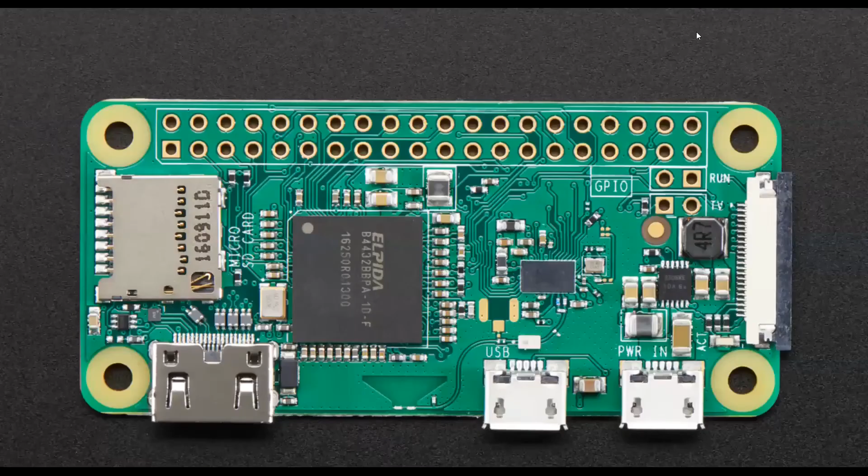Today what we're going to do is a hands-on section. We will design and case a 3D printable case for Raspberry Pi Zero or Raspberry Pi Zero W version. This is going to be a simple design, we can do it within 20 or 25 minutes, below half an hour.

It will only take below half an hour, about half an hour, depending on your skills and the time you take, but for me it will take around 15 to 20 minutes. So we will design a simple Raspberry Pi case. I took this case because most of you guys build projects using Raspberry Pi, Arduinos, ESPs, or your custom built PCBs.

Recently in Maker Chat 02, Vishnu gave us an introduction and hands-on section on how to design your PCB using KiCad and open source PCB designing software. So that is an ECAD.

Here, what we're going to do is build a 3D printable case or mechanical parts. You can design it in an MCAD, which means mechanical CAD software, and you can 3D print it using any 3D printer. So today we're going to design it and also go through how we will 3D print the design.

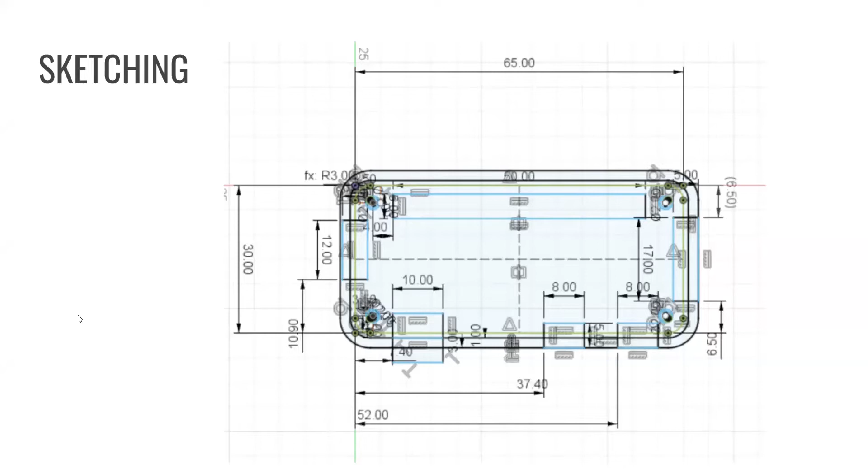We will go through the hands-on section much more. This is the case we are going to design today - a Raspberry Pi Zero case. You can design it within 15 or 20 minutes, and after designing, you can directly 3D print it.

I think now we can go to the designing section.

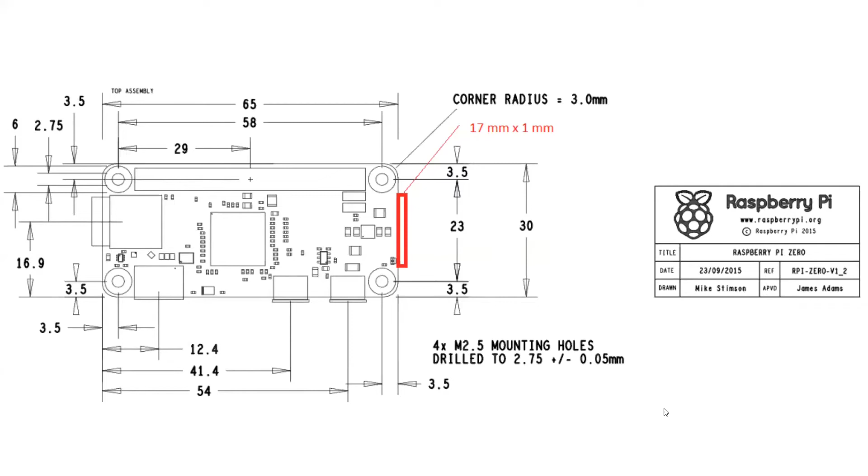I'm changing my screen share to Fusion 360. Here is Fusion 360, and this is the final sketch of the 2D Raspberry Pi Zero, and this is the 3D model of the Raspberry Pi Zero casing.

So here, let's see what is the interface. I will give an introduction to the interface.

First you need to create an Autodesk account and log into Fusion 360. You need an internet connection to use it, because Fusion 360 is cloud-based, and it also has a client application. What you see is the client application, and it works exactly like a browser, such as Mozilla, Chrome, or Microsoft Edge. Most functions like calculations and designing work on the client side, but rendering, simulation, and animations are done in the cloud, and project file savings are also done in the cloud.

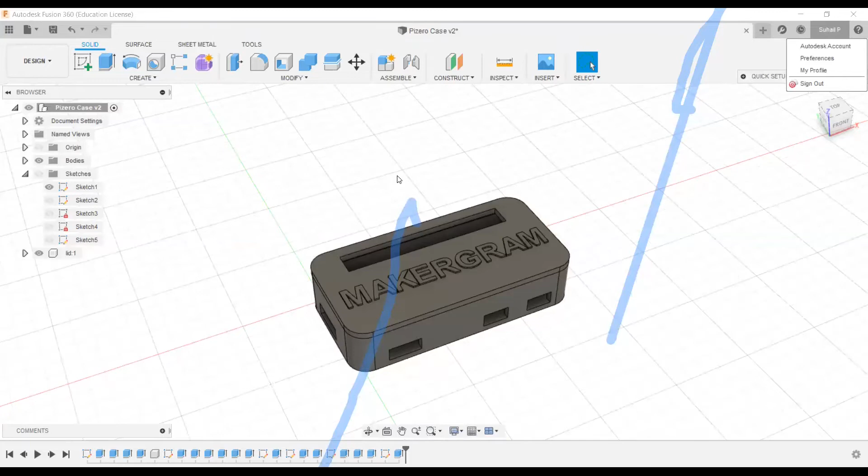So let's begin. Here in the hamburger menu, you can see all my project files. When I go to my project explorer, or the project file window, you can see there's not much since this is my new account. For this ESP32 TinyPico project, I already have a Pi Zero case.

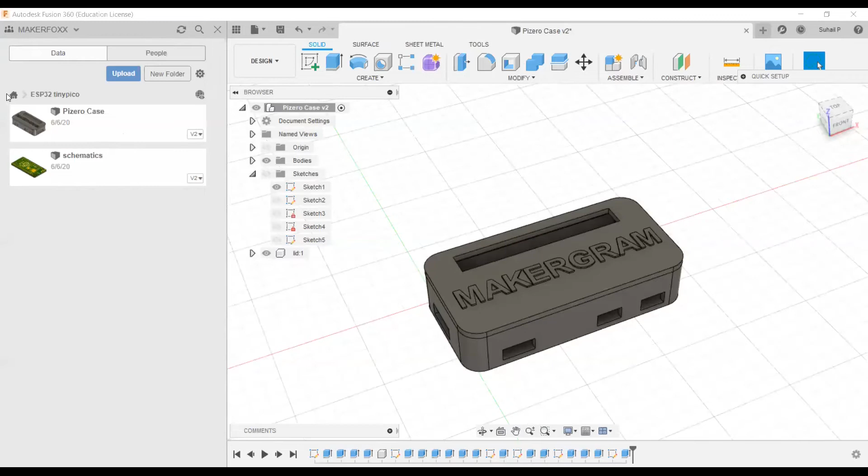Okay, yeah, so these are the projects where your work will happen. You can create a new project here, or you can directly save as a new project.

This is the project explorer window, and there is a small browser here called the project browser window. This is the project explorer, like the project explorer, which means there are a lot of sketches, 3D models, and constraints, or components added while you design. These will be accessible from this project browser window.

There's also a normal file option to create a new design, and you can create a new electronics design. There's a save option, upload option, and export option. You can export it as different 3D file formats for different CAM tools and design software. And there's a 3D print option, as I mentioned before, so we can directly 3D print your 3D model.

Another benefit is that we can directly create multiple tabs and design multiple 3D models in the same software window. There's only one Fusion 360 window open right now, but you can use multiple tabs just like in a browser such as Chrome or Mozilla Firefox. You can add multiple tabs, close tabs, and design multiple 3D models across them.

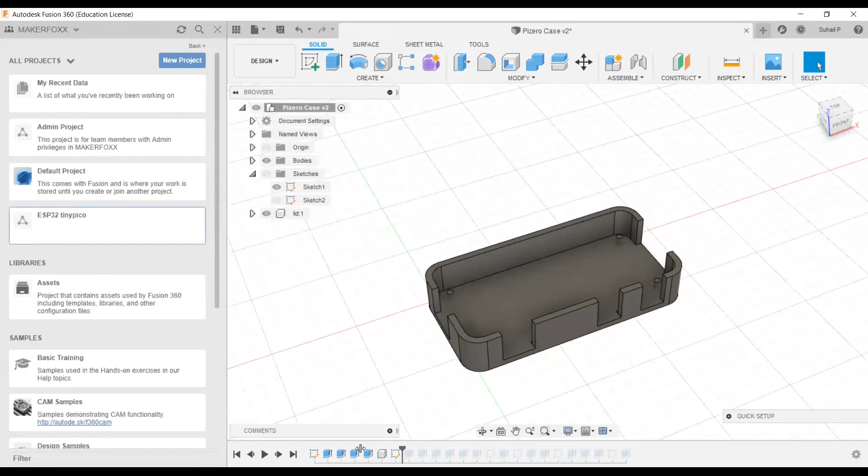There's another option at the bottom called the media control options. This is one of the most useful features in Fusion 360. Whenever you forgot to add something, or need to change a parameter or dimension or measurement, you can directly go back from here to any of your previous steps and change it.

This is the beginning of the sketch. I can right click on it and edit it. When I click edit, I can directly edit the sketch, and when I finish, all the changes will be saved to that design, and we can come back to the current position. This is also a benefit because you don't need to do undo and redo. Instead, you can directly go back to any point in the design process whenever you want. Here, around 20 steps of the design process were used, so you can go to any previous step and change the parameters.

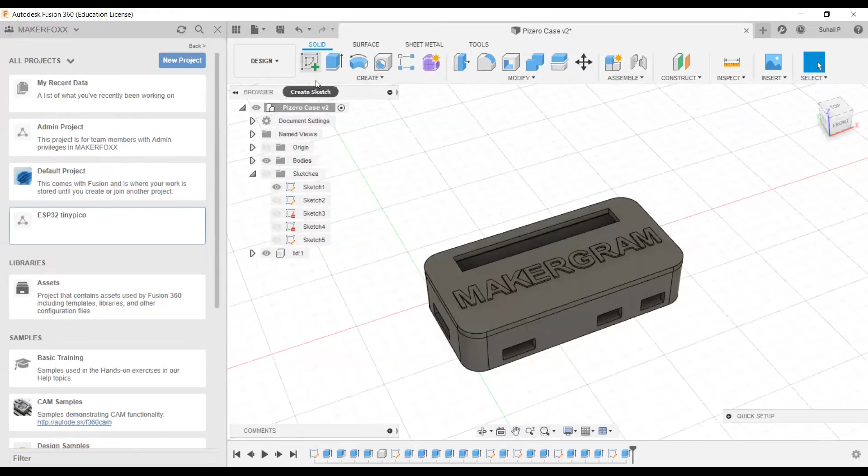Other than that, these are the project workspace. When I zoom out, you can see this is 200 by 200, and it will expand automatically according to your dimensions, so you don't need to worry about the workspace. From here, you can create a sketch, and these are the options to create a sketch in the design.

As I previously mentioned, there's a design workflow: design, render, animation, simulation, manufacturing, drawing. Today we'll only be covering the design section. In the next maker chat, we can hopefully cover rendering and animation.

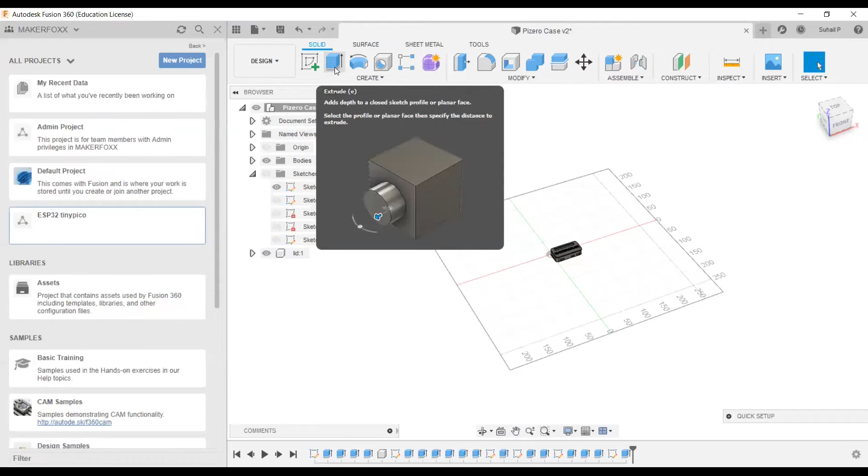In the design section, we have sketch creation, where we can start from a sketch. Then we can do extrusion, taking a 2D sketch and directly extruding it into a 3D model. There's also the revolve option, where from a single sketch like a circle or rectangle, we can revolve it into a 3D shape.

Holes let us create a hole in a 3D model. Rectangular pattern lets us place 3D models in a rectangular pattern. And mesh, or create form, is basically sculpting - exactly like clay sculpting, where we can sculpt from a 3D model.

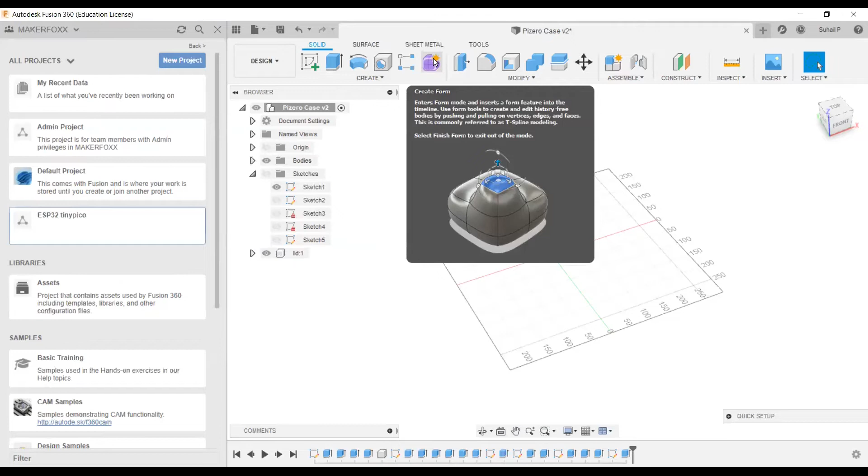This sculpting feature is not commonly used much. There are other tools like press pull and filleting, which lets you round edges and corners. There's also shell, which lets us shell a 3D model, as you can see in the image.

If we have two 3D objects that need to be combined into a single object, we can directly use this tool to combine them. There's also another tool for the opposite - from a single 3D model, you can directly split it into two objects.

There's also a move and copy tool, and another for new components. In Fusion 360, you can directly see components here - this is the primary component, or the mother component. In Fusion 360, we design using 3D bodies and components.

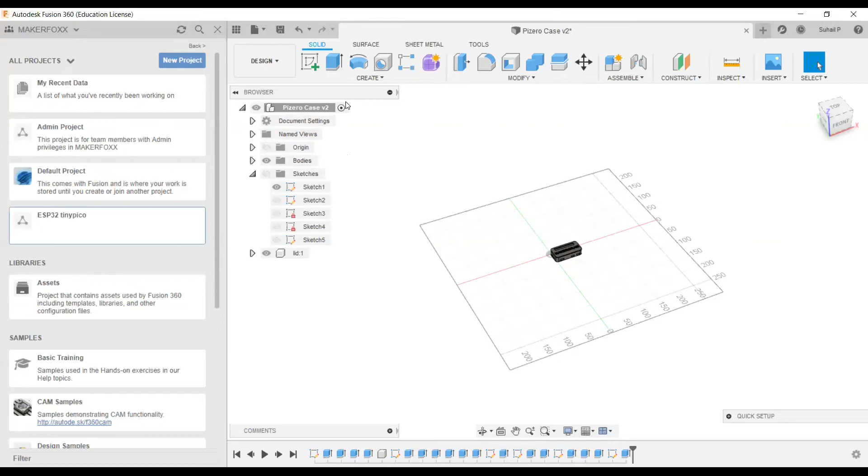Objects are multiple 3D models, and components are multiple components. Let me show you an example here. This is a 3D case - the entire case. So there's a 3D model here, a 3D body.

In 3D mode, there's an eye icon - if you use it, you can show that 3D body in your workspace. When I turn off the eye icon, it disappears from the workspace, and when I turn it on, it comes back. This is the first Pi Zero case we took, which is the primary component.

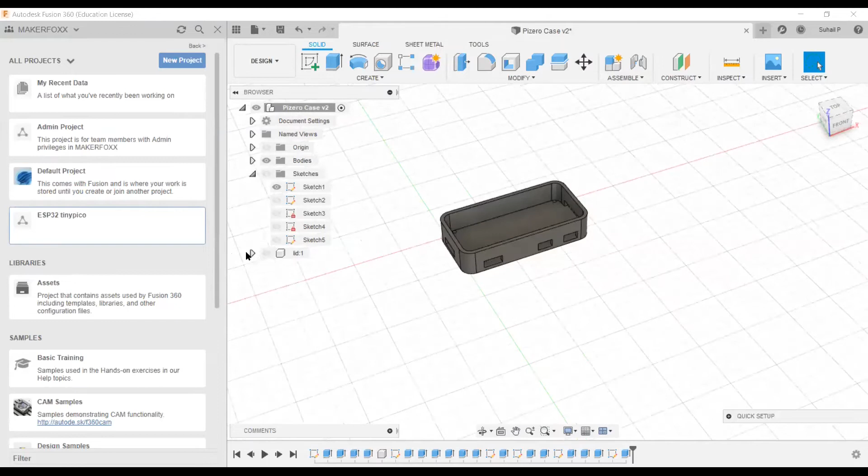There's another component I added named 'lid,' which is the top cover - the top portion, an entirely new component. These components are used for creating multiple parts. Here you can see only the lid when I turn that on, but when I click on the primary, I can see both.

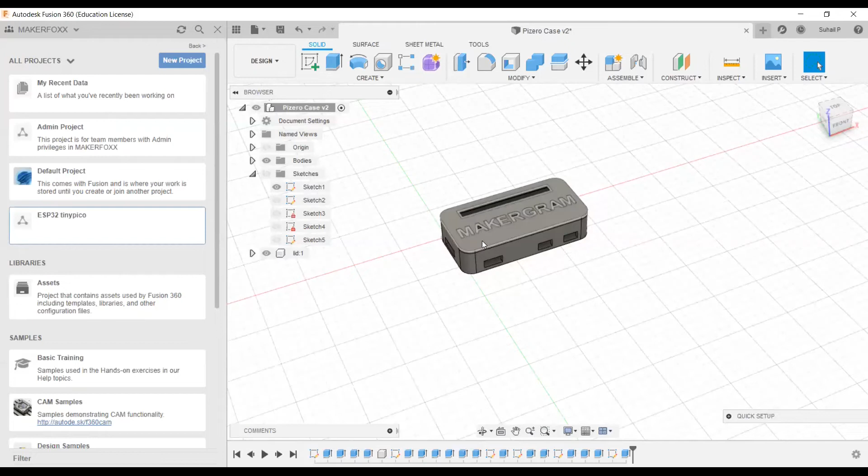If we consider a phone case, there are a lot of components: the frame of the phone, the front screen, the digitizer, and the back portion. Components are mostly used in product design, not prototyping. For rapid prototyping and additive manufacturing, we don't need components that much, but if designing a product, there are a lot of mechanical or electronic components involved in the design.

So we can go to the commands. These are the basic sections, the basic work interface of Fusion 360. From here, we're going to directly start designing the Raspberry Pi Zero case. Here there's a sphere.

The sphere is a view control - a 3D view that we can control. To control the 3D view, you can left click on that sphere or the cube and do the pivot for a free view, going to any side. Alternatively, if you don't want to click and drag directly, you can click and hold shift while using the middle scroll wheel button of the mouse.

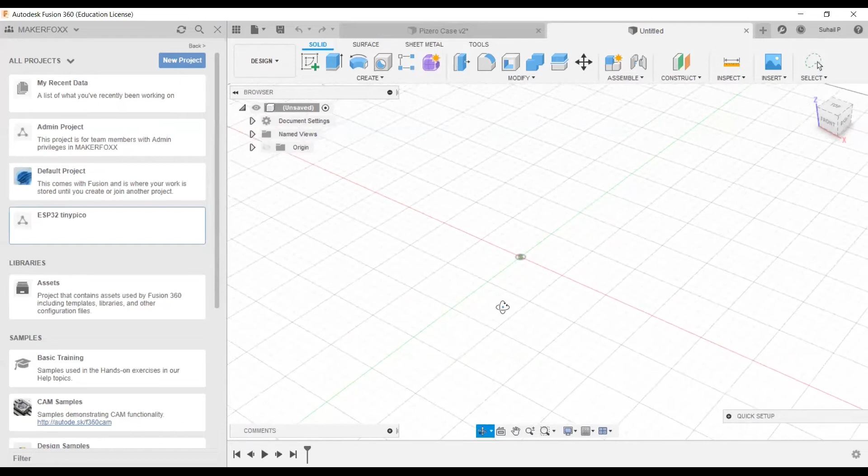Click the mouse button and hold the shift key, and you can directly free view the workspace. But instead, I'm just going to top view. I click on that cube, the top section of that cube, so here I got the top view. Using the mouse wheel, you can scroll down or up to zoom out and zoom in.

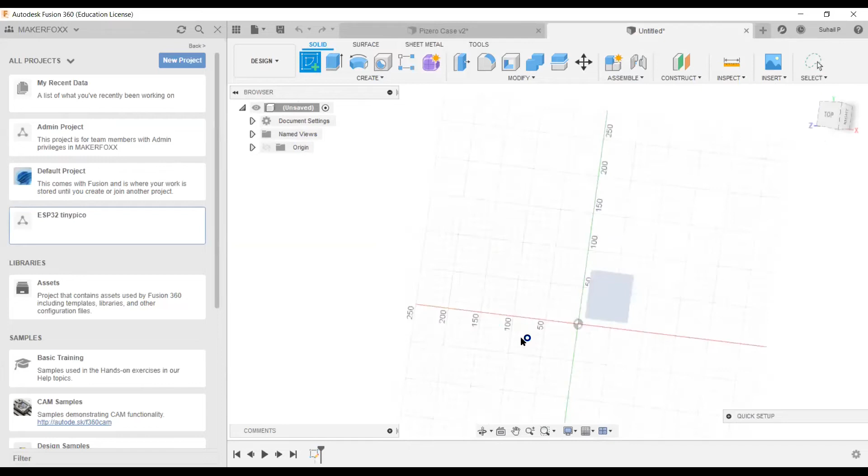To create a sketch, we need to start from a sketch. So click on the create sketch option and come over here. There are three surfaces, XY, XZ, and YZ. What I'm going to do is I need the bottom surface, so I just use the XY surface. When I select the XY surface, it automatically comes to the top view, because we can see the top view from that surface area.

To design a Pi case, I need the exact dimension of the Raspberry Pi Zero, so I took a screenshot from here to take the reference of that dimension. I just click escape, because it's much easier to see like this. The exact dimension given here is 65 into 30 - the length is 65, and the width is 30. It's already in mm, so we are doing it in mm. 65 means 6.5 centimeters, and 30mm means 3 centimeters.

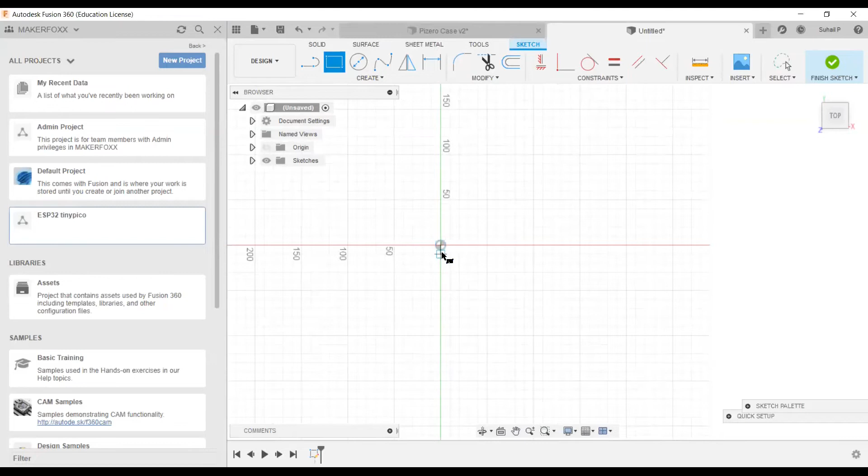So I'm going to draw a rectangle here. To draw a rectangle, I click on rectangle, and when we create a sketch, here we have a 2-point rectangle option. I click on the 2-point rectangle and go to the origin, which means 0,0,0. I click on the origin and drag it here. To change the dimension, I can insert values - there are two text boxes for height and width. I enter 30 for height, and 65 for width. So we got an exact 65 by 30 rectangle.

From here, I zoom in a little bit to see much more in detail. I go back to the browser and I need to check the corner radius. Here they said the corner radius is 3mm.

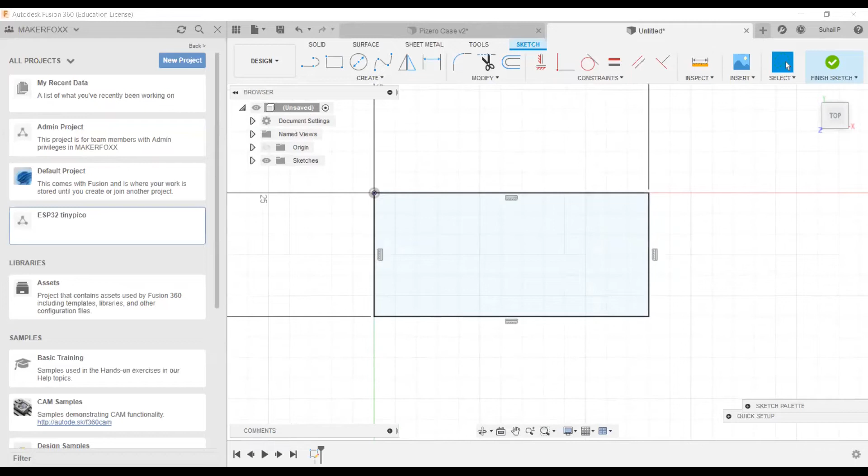So I came back to Fusion 360, and there's an option for filleting - this is for 2D filleting. I click the 2D filleting option and click here. You can see a red mark showing how it should happen, so I click here and enter 3mm. When I do the 3mm, it fillets to 3mm - one of the corners is done to 3mm. But I need to do it simultaneously - I need to do the other 3 corners at the same time.

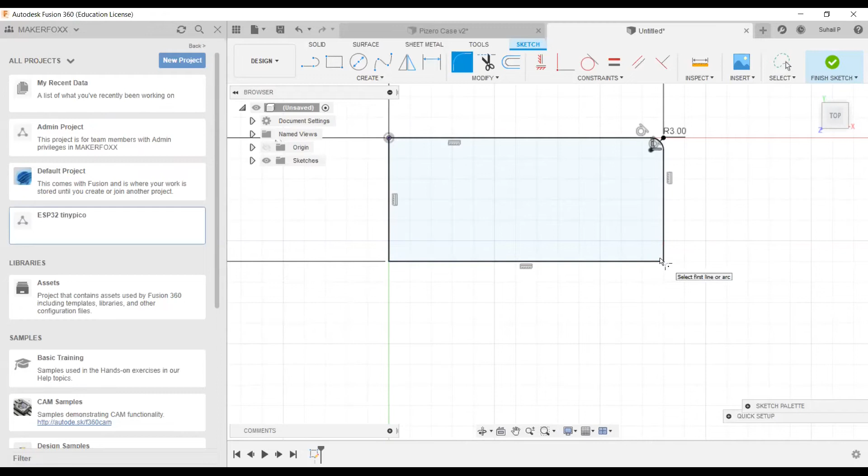So what I'm going to do is click here and hold shift. When you click and hold shift, you can select multiple corners. Right now it's set to 5, so I just enter 3 into the text box.

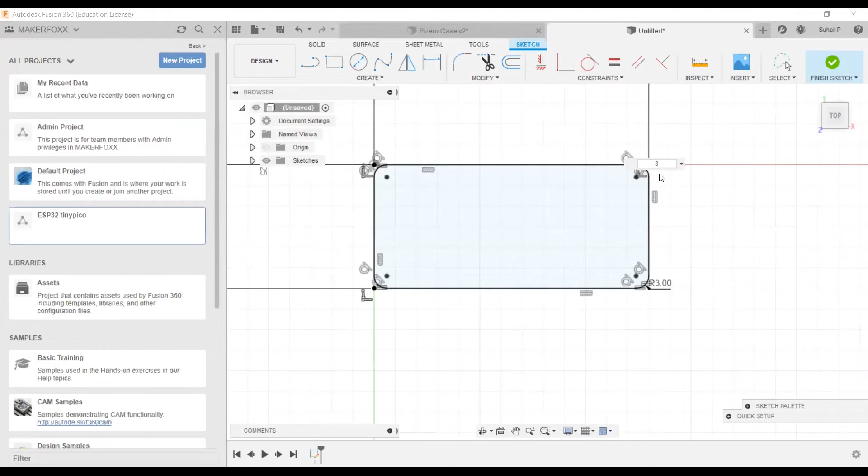The default dimension unit is mm. If you want to change to centimeter, you can directly select the centimeter option here - the default is mm. So whatever number you enter, it takes it as mm. But if you need meters or centimeters, you can directly select centimeter or meter, or if you want inches, just insert 'in' and it will convert to inch. But right now we just need mm, so I inserted the 3mm.

Now what we want to do is insert these 4 screw holes. The distance is already specified. Let me annotate here using the spotlight tool. From here to here, it's 3.5 mm spacing, and from here to here, it's also 3.5 mm. From the left side to 3.5 mm spacing, and from bottom to top, also 3.5 mm. So there's a little bit of padding.

So what I'm going to do is create a circle here. Let me select the circle tool. Before doing the circle, I need to know exactly where the 3.5 mm point is. So I take the line tool, click on it, and draw a line. It has a magnet feature.

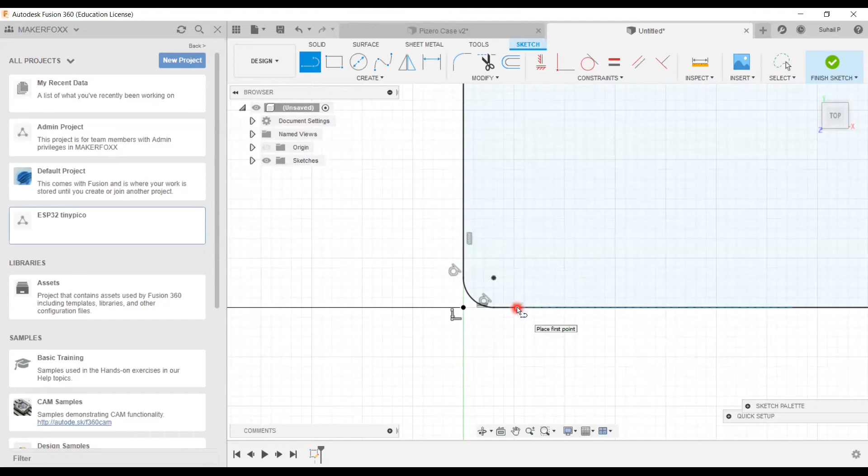Whenever there is a line, pole, edge, or surface, it will automatically connect or focus into that line. So here I create a line. From here, I'm going to set it to 3.5 mm, and I just click enter. So there is a line here.

Then I need to create another line, and I'm going to set it to 3.5 mm here as well. So the circle needs to come here, from here to 3.5 and from here to 3.5. So I just added this line here.

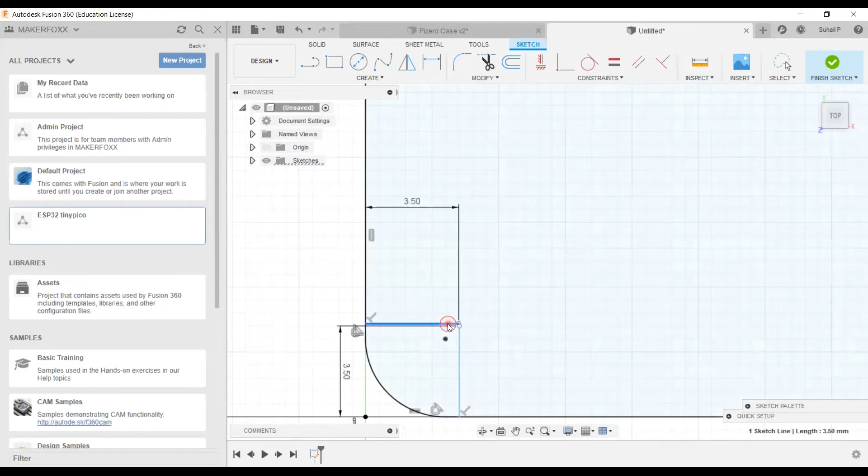What I can do is move it here. I just click the line and drag it here. So I just drag it to here. So these both are 3.5.

But these lines, we don't need them as lines. Instead, what I need to do is click and hold the shift key, and convert it to a construction line. To do this, go to the constraints - or actually there is a sketch palette here. I open the sketch palette, and there is a construction option.

The construction option is like an index line, so it doesn't appear in our final design. It's only for our measurement purpose. So I converted it to construction lines. You can see the construction lines here are a little bit blurred, and shown as dotted or dashed lines.

Now I selected the circle here, and I need to know the dimension of that circle - the screw hole size. Let me see... yes, there are 4 M2.5 mounting holes here.

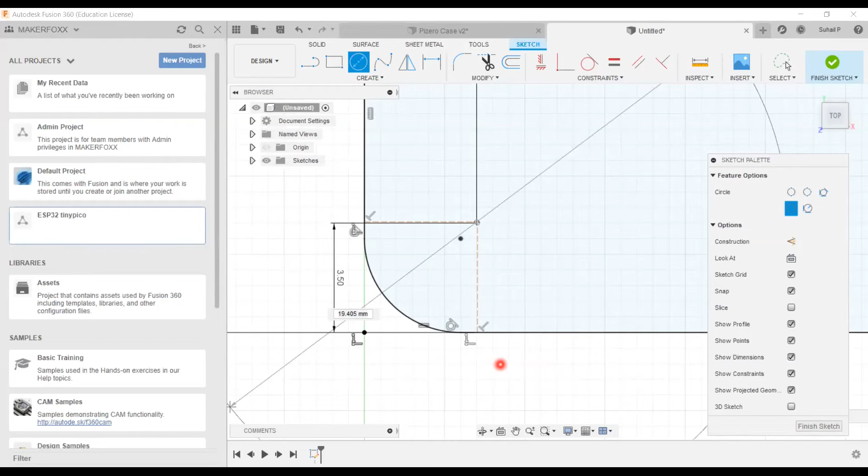So drill it to 2.75, with a tolerance of 0.05. So we need to take it as 2.75 mm drilling holes. So what I'm going to do is enter 2.75.

From here, what I need to do is copy it to multiple locations. I don't want to add it by repeating the same function for the remaining three corners. Instead, I'll select the line tool again.

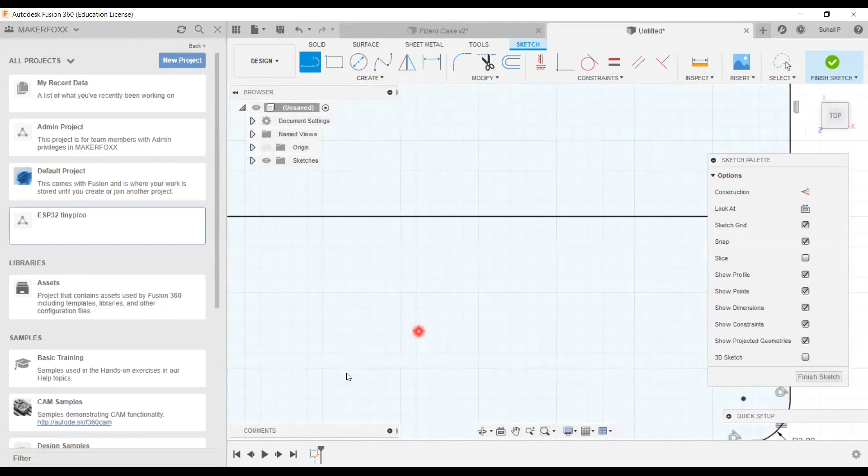I just come here, and here you get a triangle, which means it is the center of that line. So I go to the center of that line, and come here, and here also we got a triangle, which means it is the center.

So I click it here, zoom out, and come to the width side, and I got the center line. Then I go to the next opposite of that line, so I got the center of the area - this is the center area.

So what I'm going to do is change it to a construction line again. I click escape to exit the tool, select both of those lines, and convert them to construction lines. You can see it has changed to construction lines.

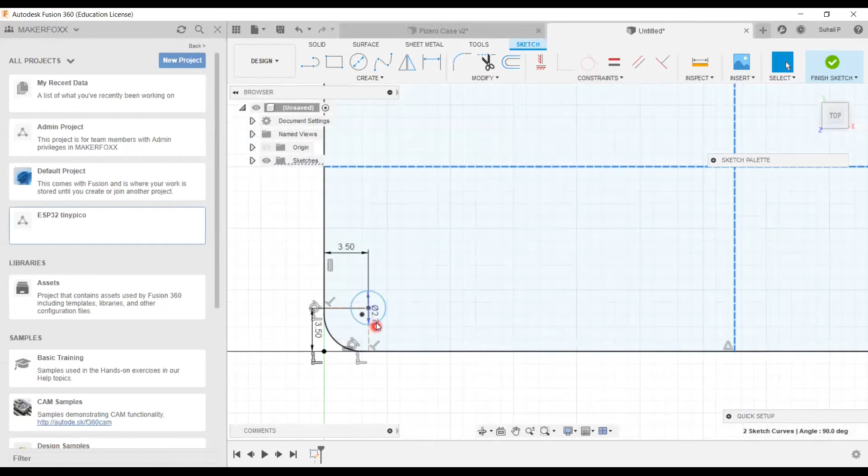And what I need to do is mirror this circle to here. So there is a mirror tool here. I click the mirror tool, and you get a parameter window.

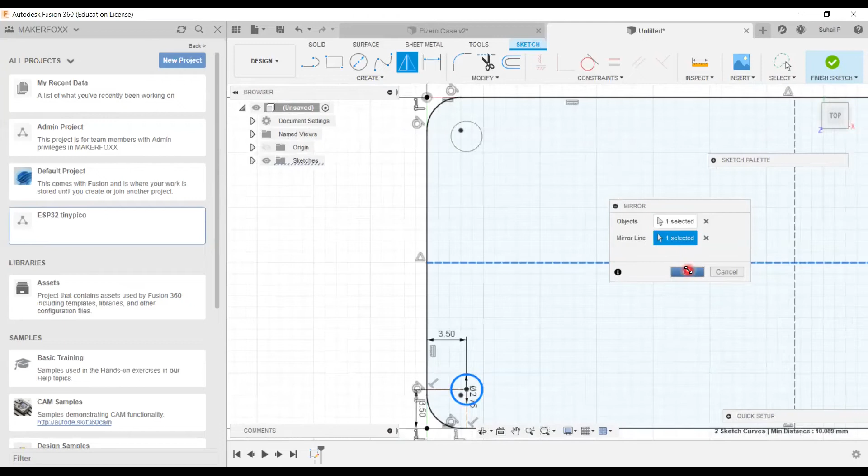What I'm going to do is select the circle. I need to deselect all this, and select it again so I get one object selected. For the mirror line, it's just an index line, so I select here. You can see it is directly mirrored to here, with exact dimension. This is a symmetrical mirroring of the circle, so all the parameters and dimensions should be exact.

So what we can do is measure if it's the same. You can select the dimension tool - here is the sketch dimension tool, or you can simply use the shortcut key D. I click that circle, select the top line, and shift hold to multiple select, then click the circle.

See, this is 3.50, which means 3.5. So we don't need that - I just deleted that dimension. So here all these are the same.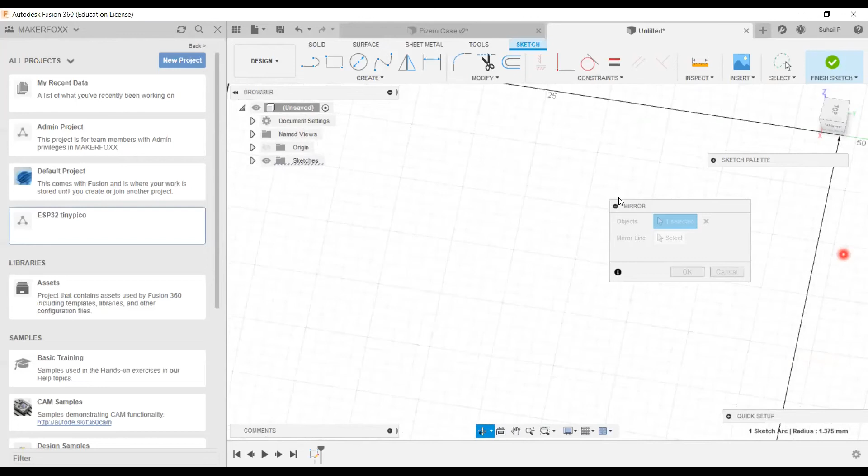Now I want to again mirror this to the opposite side. Sorry, sorry for that. Yeah, okay.

So I select both of them, and use the vertical line to mirror this vertically. See, it comes to the opposite side, and everything is in the same location. So here we added the mounting holes.

Now what we're going to do is the header pins, 2 into 20, 20 header pins. These are 2 into 20 Raspberry Pi header pins, with dimensions 50 into 5. They don't mention the measurement of the header pin, so we need to take it manually.

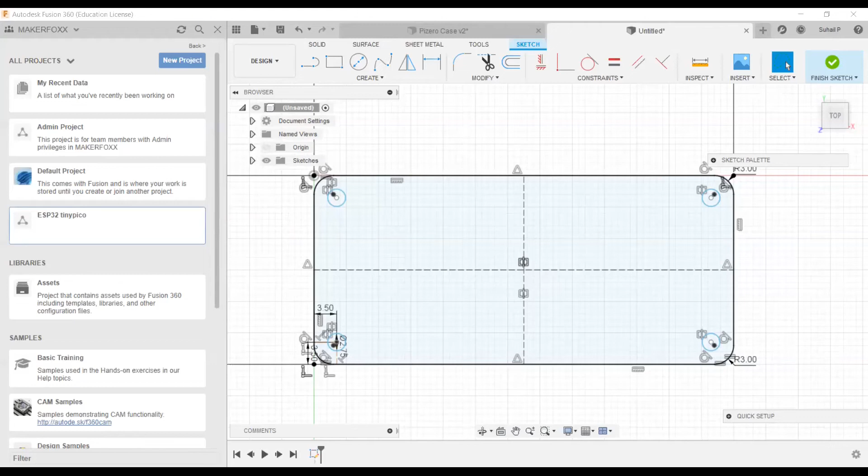So I took it from my Raspberry Pi - it is 50 into 5. So what I'm going to do is create a rectangle, and make it 5 and 50. So 5 into 50 here.

Now what I need to do is bring it to the exact position. From center, like from the 25mm center of that header pin to here, it is like 29. So from here to here is 29.

To do that, come to Fusion 360. Take the dimension from here to here, it is 4.5, and from here to here, sorry, to here, it is around 3.5.

So what I'm going to do is take a calculator - I prefer a normal calculator. I add 50 plus 3.5 plus 4.5, which equals 58. Then I need to minus the 50, the size of the header pin, giving 8. So I need to keep a distance of 8, 4, 8, 4, and here to here 4, so it remains an exact 50 in the same location.

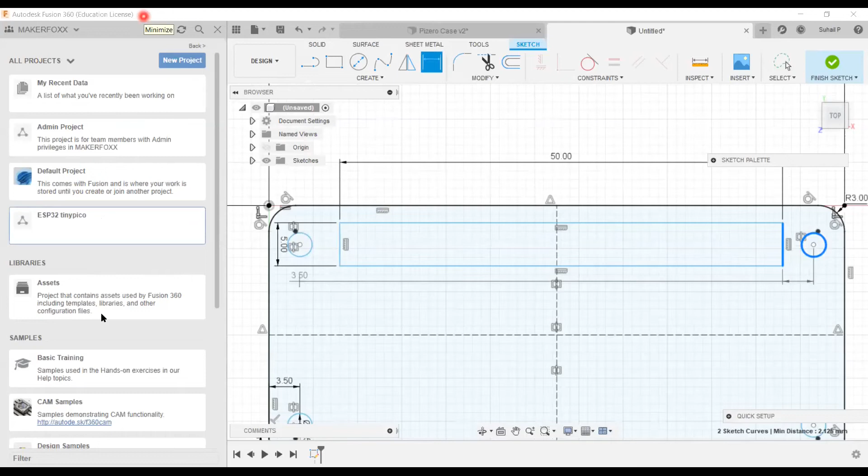So what I'm going to do is select the dimension tool, then select the circle, and give it 4.

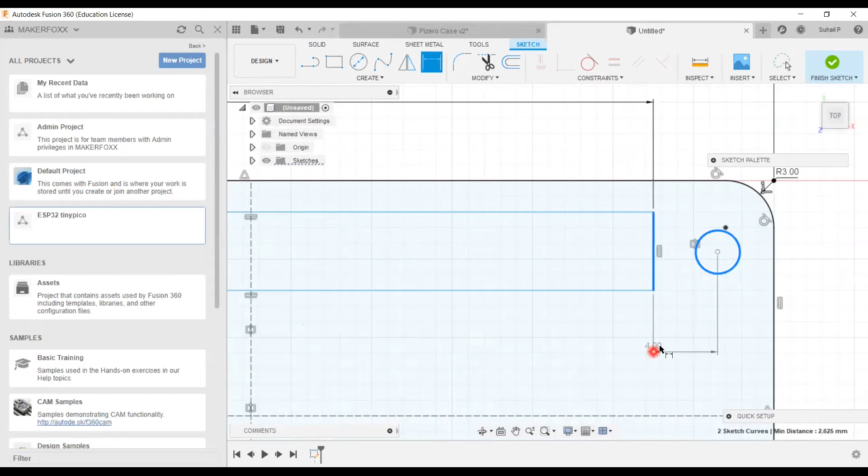So we need to check - here from the circle, from the hole to the header pin, it is 4mm. We need to recheck the other side to see if it's exact and correct. So I select here, use the dimension tool, and got it is 4mm. See, it is 4mm.

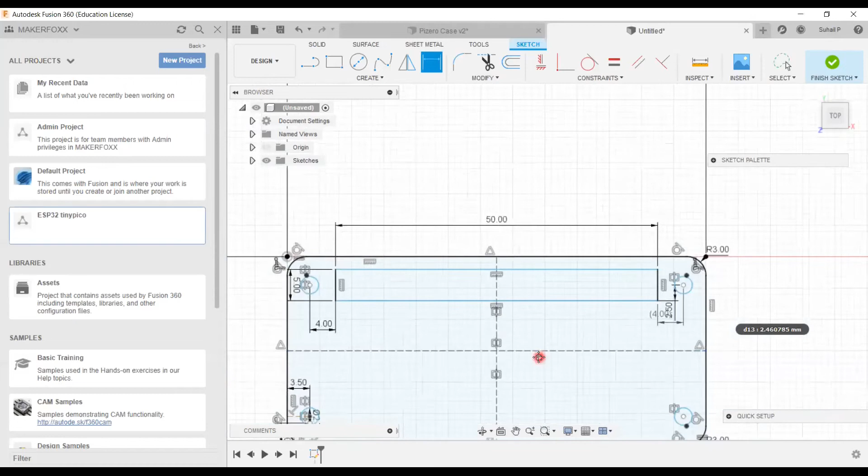So right now it is in the exact location, and we need to check if there are other constraints to center it. We can try that - it is already in center. So I select both the lines, and set it to 2.5. Now it is exactly in the same location as that header.

Next, we need to do the header pin. So instead, what we need to do is search for Raspberry Pi Zero, Raspberry Pi Zero W, and see the image. From this image, there is an SD card, a mini HDMI port, and two...

Suhail, hello? Actually, we can only see your Fusion 360 window - we can't see the image because you only shared the software. Okay, sorry, so it will share both. Salman, is there anyone recording the video? Yeah, recording, yes, thank you. Let me stop this screen share and change it to the next one. Okay, thank you.

Thanks for notifying me. So can you see that Raspberry Pi Zero here? We've done these 4 holes and header pins, so it is in the exact location.

Now what we need to do is align this SD card holder, this mini HDMI port, the 2 micro USB ports, and this flex cable connector. So let's see what dimensions they are giving.

What they are providing is the flex cable connector is 17mm into 1mm, so we need to make a hole of 17mm. For the SD card, HDMI, or micro USB, they did not give the dimensions, only the spacing from the center. So they gave us the alignment of the component but not the measurement.

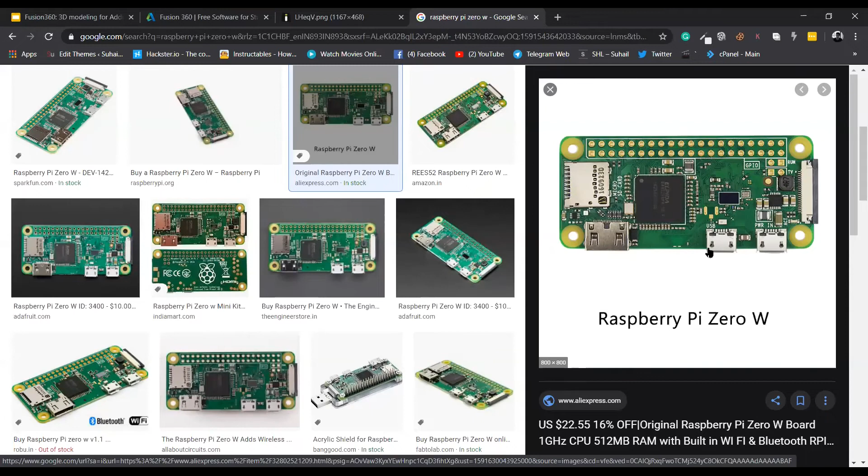So we are going to Fusion 360. Let me share my screen to convert to Fusion 360. I'm going to share Fusion 360, hopefully you can see it here.

So what I'm going to do is create a rough rectangle, like 12 and a tab, just any like 6 or something, so I just want to put it in an outside area. So here, what I'm going to do is 12 - I just need the height, not the width, so 12.

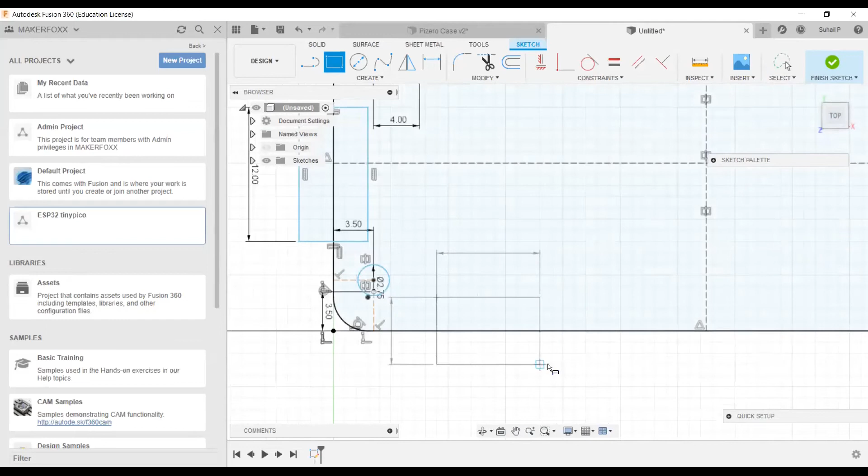I'm also making another rectangle of 12 here, so the width I just need 12, and another one, let's stick with 6. So I've done another rectangle here.

And then I also create another rectangle of 8mm into 6mm. I need another rectangle, so 8 into 6. So here we added the SD card, the HDMI, the 2 micro USB, and also we need to do the flex cable connector, which is like 17.

Into 6. So now we just create 17 into 6. So we added the exact rectangles and squares for those components.

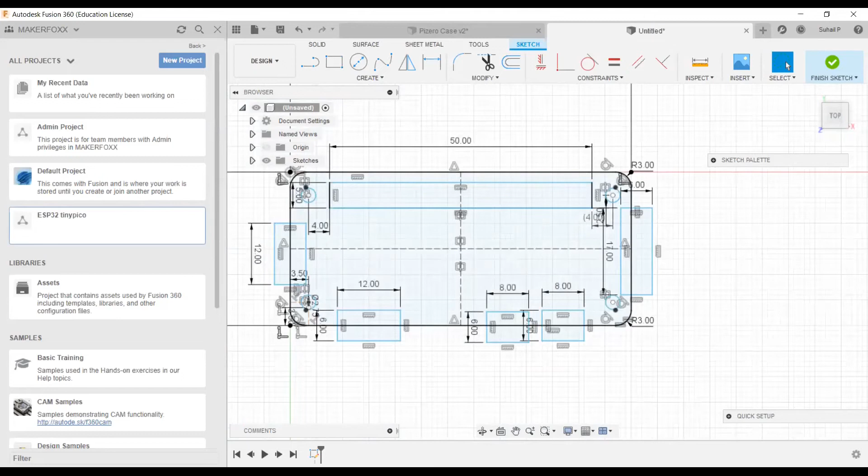Now what we're going to do is we need the dimensions, the exact spacing dimensions. To do that, let me once again share my screen to change to the dimensions.

So here you can see this is 17mm, and here the spacing is 16.9, from the center of this, not the point. This doesn't start from here, we just need to start from here.

But instead they gave it from the center of that SD card connector - it is 16.9, and this mini HDMI it is 12.4, the other micro USB is 41.4, the other connector is 54, and the flex cable is 20. It is centered, both are centered, that's why they are not giving the dimensions directly.

So we are going back to Fusion 360, and what we're gonna do is first we need to fix this - we need to align the SD card. To do that, I go into the dimension tool and select here.

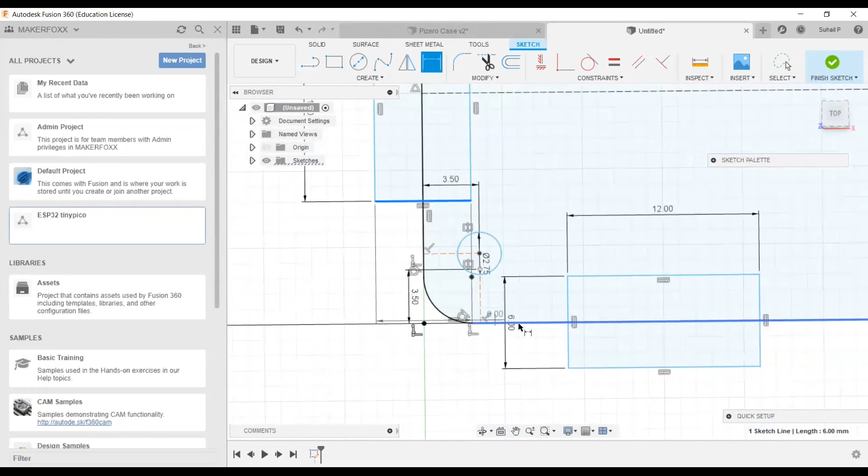To here, let me confirm it - from here to here, yeah, from the bottom to the SD card it is 16.9. So when I click 16.9, it will go beyond that - see, it is over aligned.

This happened because Fusion 360 starts measuring from the end, but in the Raspberry Pi documentation they started from the center. So we need to take the half - we need to minus half of this dimension, which is 12.

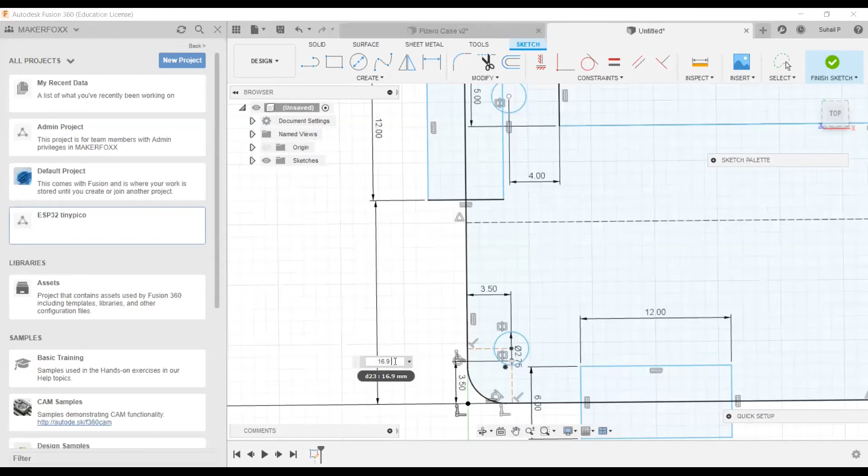Now it will be around the exact location. To do that, I calculate 16.9 minus half of the SD card dimension, which is 6, equal to 10.9. So we can directly enter 10.9, or I can do 16.9 minus 6. So I just entered minus 6, and now it is in the right location.

We also need to do the second HDMI, which is 12.4. To do that, I click here, 12.4 minus half, which means 6. So here I entered it, and you can see the mini HDMI port is now aligned.

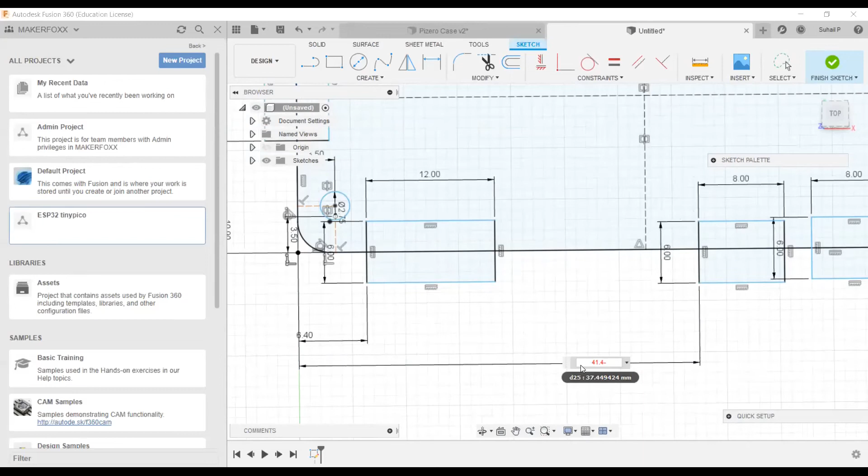Now we need to align the first micro USB. It is 41.4, 40. So we enter 41.4 minus, it is 8, right? So minus 4, since the width is 8. So half of 8 is 4. I just entered 4. So 41.4 minus 4 is in the exact location now, 37.40.

Now select the second one, and I click the starting line, and I need to confirm it. So it is 54. I'll enter 54 minus 4, which means 50. So it is exactly aligned.

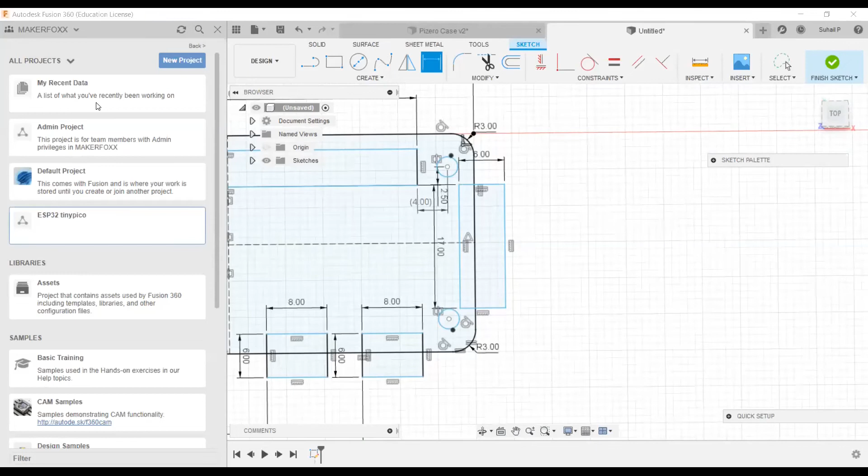Now from here to here is 30. We need to calculate the 30. So I turn on the calculator and I minus 17 from 30, which means 13. When we divide it by 2, it means 6.5. So we need to keep 6.5 from here to here, and I also need to confirm the bottom, which is also 6.5. You can see it is 6.5, so it is aligned center to center.

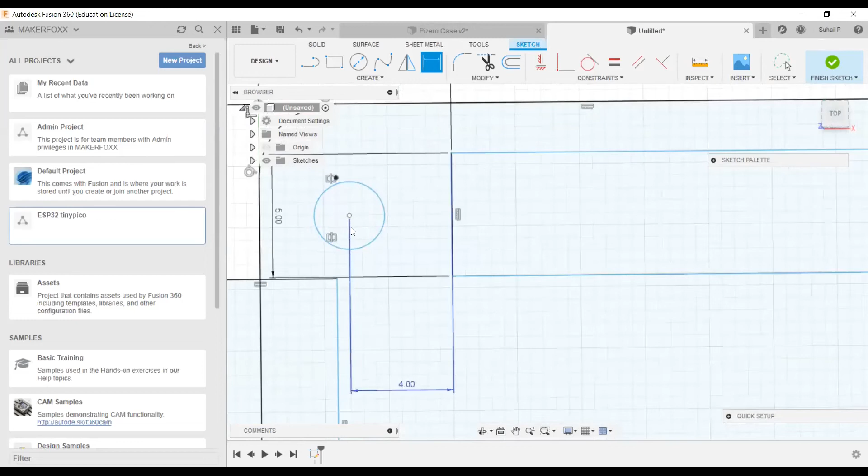So here we've done everything. Every dimension is entered now. This will be useful in the upcoming section. Now I need to create the sketch for the casings, so the surface.

So I'll use the offset tool. Select offset, it's simple, and click on the rectangle. We'll get a minus offset, so we need to bring it to here, to give a spacing, wall spacing for the casing.

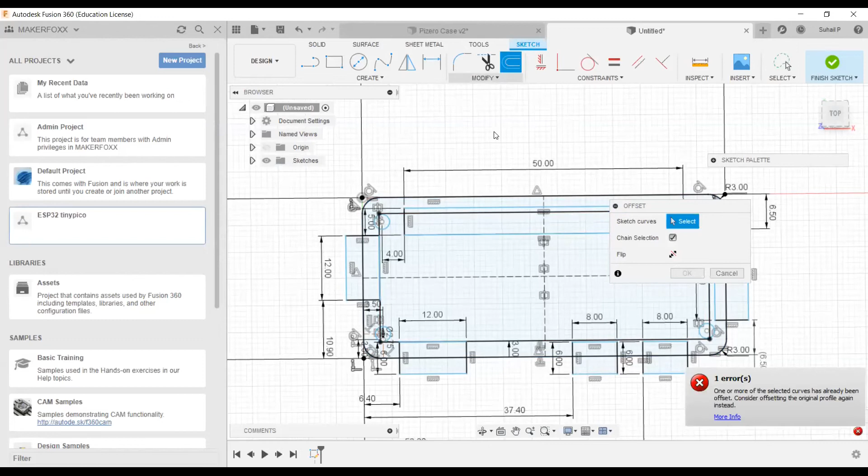To do that, I need a 1 mm spacing between the wall and the Raspberry Pi PCB, and for the walls I need to keep 2 mm. So I entered 3 mm, and I also create another offset, an inset of 2. This will create a 2 mm inset, so the PCB will keep a 1 mm spacing.

Now I need to extrude the bottom first. To do this, I'll create the wall first. So I select, I need to remove this, and select all the planes, select everything, and we need the sketch again. Select every circle, select every space, so it will turn into blue.

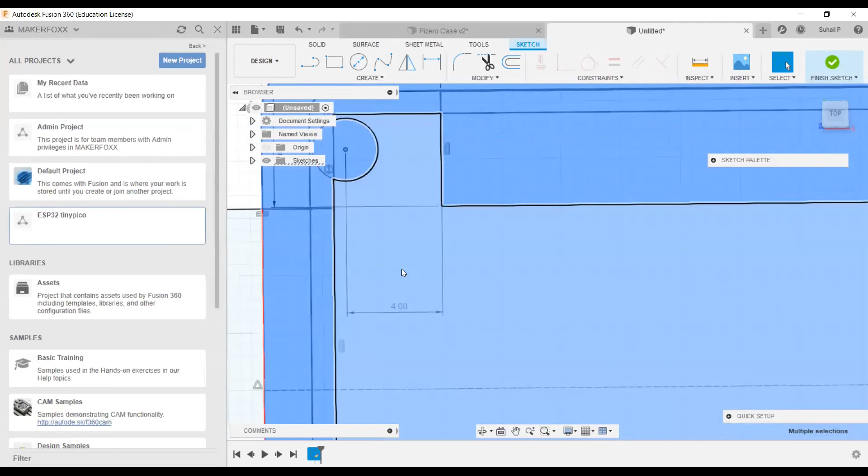Select everything, selecting all these lines, and I need to extrude it into a 3D model. I'm just selecting everything. It should be a frustrating, time-taking moment for you, and that's one of the issues. So selecting this, I selected all, and now I finish the sketch.

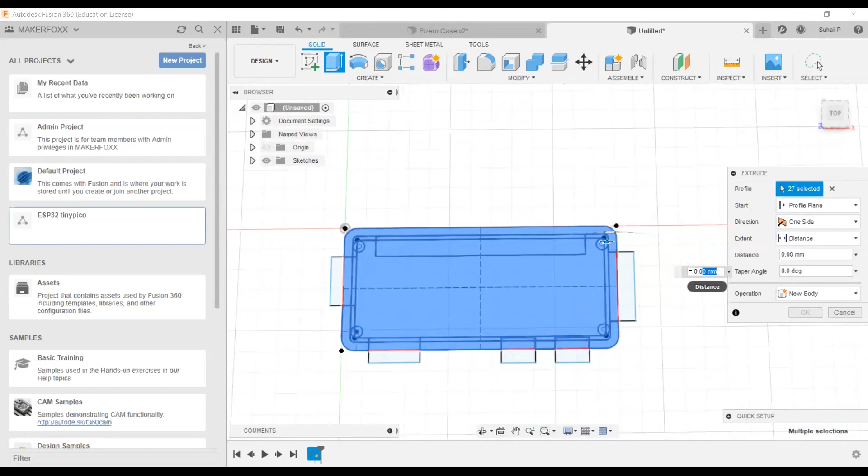So select all, and now I extrude. To extrude, you will get another pop-up, which you don't really need to consider right now. It will create a 2 mm height, so I created 2 mm, and it will turn into a solid surface. Now come back to the sketches folder and turn on sketch one, and I turn off the bodies and select these walls.

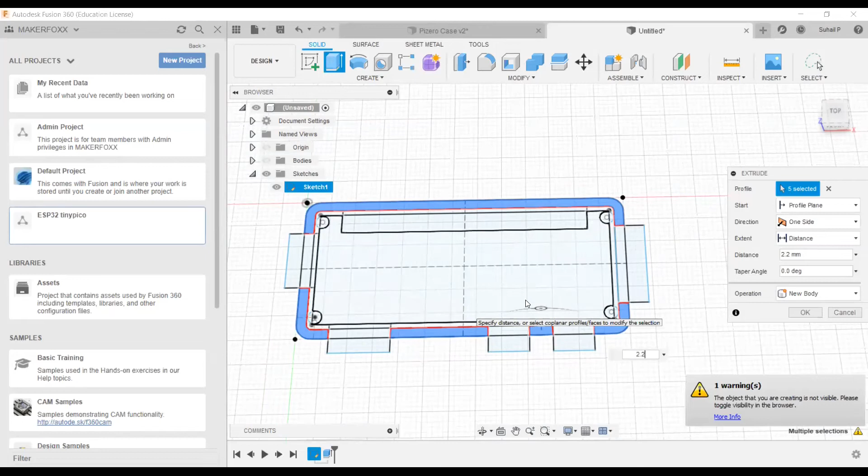For walls, I'm going to select all the walls I need. The total height I need is 12 mm, so for the extrude I'll do 12.2 mm because I'm giving 2 mm for the bottom surface. So I'll enter 12.2 mm and make sure you turn on the bodies.

Instead of the default operation, change the operation to join, and it will join to that single body. So just join and enter 12.2 mm. Sorry, not 12.2, so 14 mm.

With 14 mm, it will give an exact 2 mm surface. So from here to here it will be 12 mm. We need to consider using the inspect tool to make sure of the measurement.

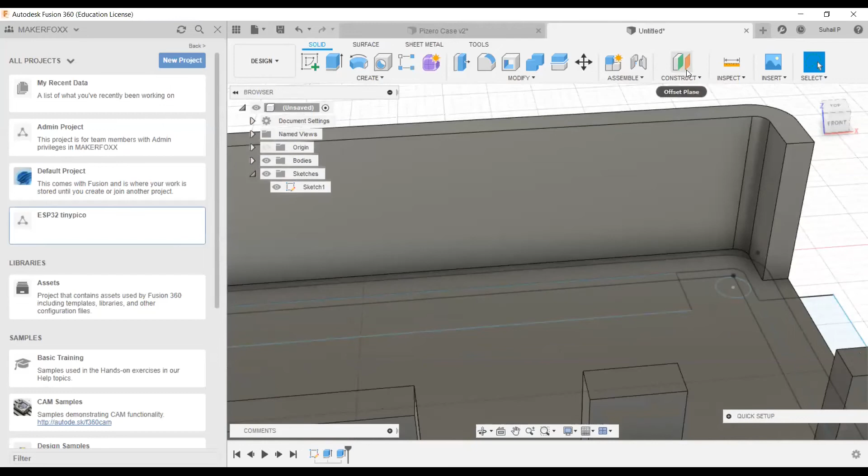So I'm going to select this and this. The distance is 12 mm because I gave the offset value of 2 mm. So we can confirm it.

Now what we need to do is, instead of doing any screw holes, I'm going to create some standoffs for the PCB to set it correctly.

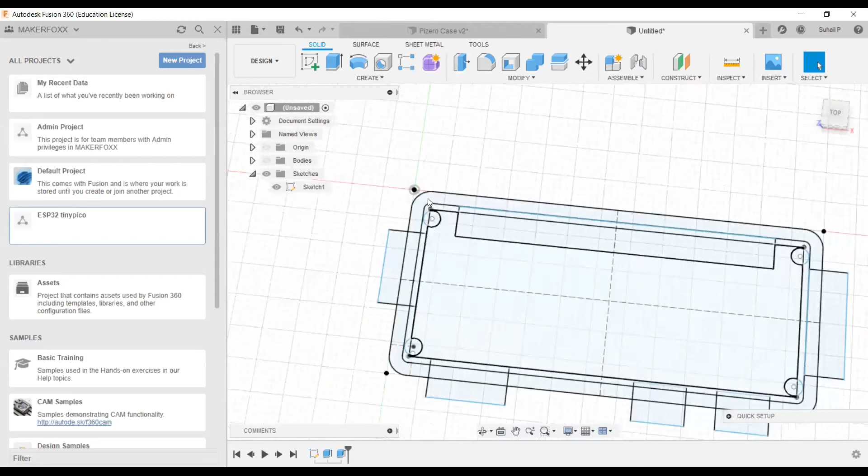So what I'm going to do is turn off the body again, and I'll create inside the circle. I'm just editing the circle again.

I'm creating a 2.5 mm circle inside that circle. I'm just adding it - this is a simple way to do it, just doing it at 2.5 mm inside.

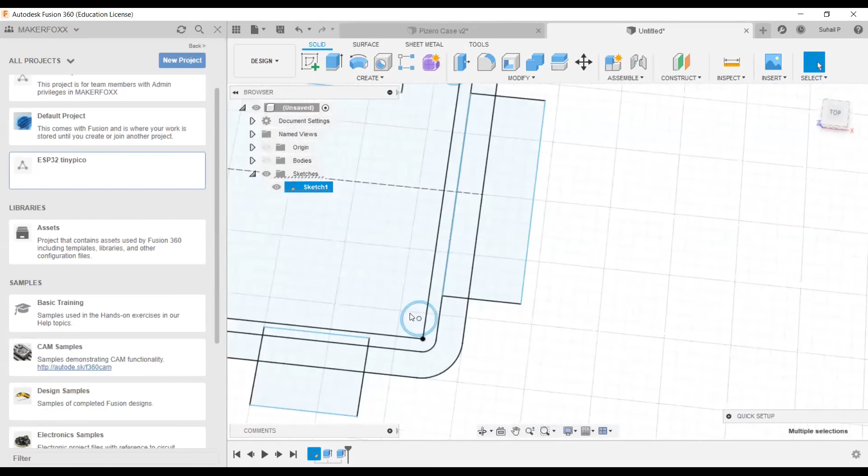This is to create the standoff. So what I'm going to do is select these circles, select all the circles, and extrude again. What I'm going to do is 5 mm plus 2 mm, equals 7 mm.

So I just added 7 mm, and set it to join. So when I turn it on, there is 7 mm here. The 5 mm isn't a big size, but it's okay - we can keep this to place the PCB correctly.

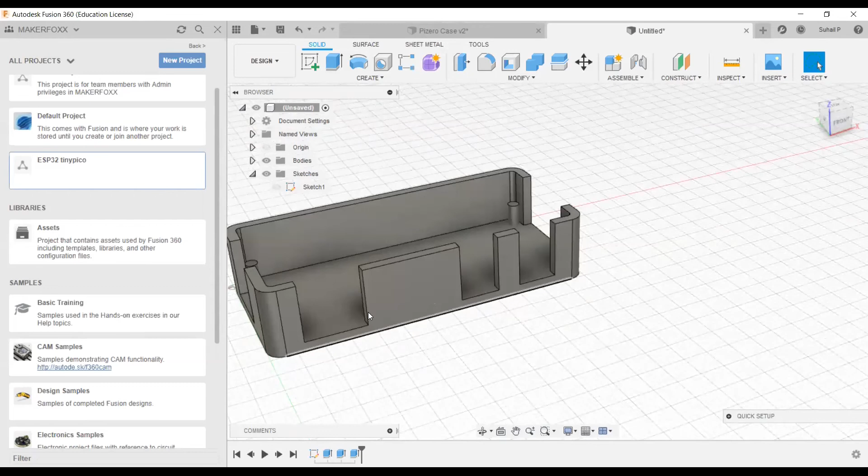Now what we're going to do is close this area. The maximum height of all these connectors is about 4 to 5 mm, so I'm going to give a hole size of 4 mm.

So what I'm going to do is create a sketch on top of this design - click on the top of the design and click sketch. This will create a top sketch. Now I need to create a rectangle here.

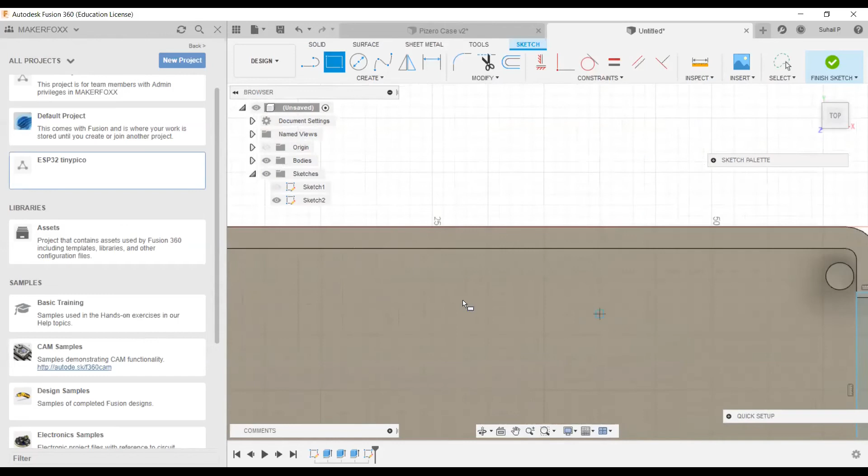I need to close this area, so you can just do it randomly - I'm just doing it randomly, creating from here to here, just closing these spacings to close the area for the ports.

So I'm done, and I finish the sketch and click extrude, then select all this area - select all the area.

Now I need to give a 4 mm value. So 12 minus 4 equals 8, so I'll do minus 8 to go below. Red means it's cutting and will remove from the 3D model - instead I'm going to do join, so join and click enter.

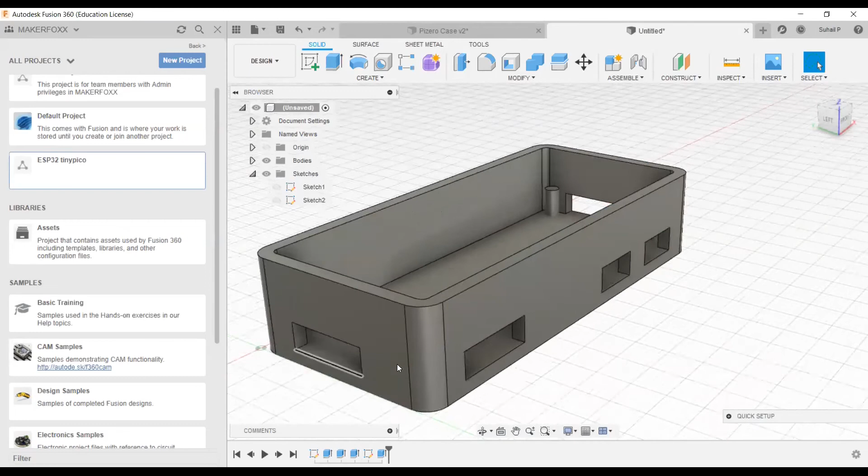Now we can inspect how much spacing we've given. See, it is 4 mm, we gave 4 mm, so it is enough for the holes.

Now what we're going to do is create a lid. The lid is another component. To make this lid, the best practice is to create components, since Fusion 360 is based on components - so create a component by right-clicking here.

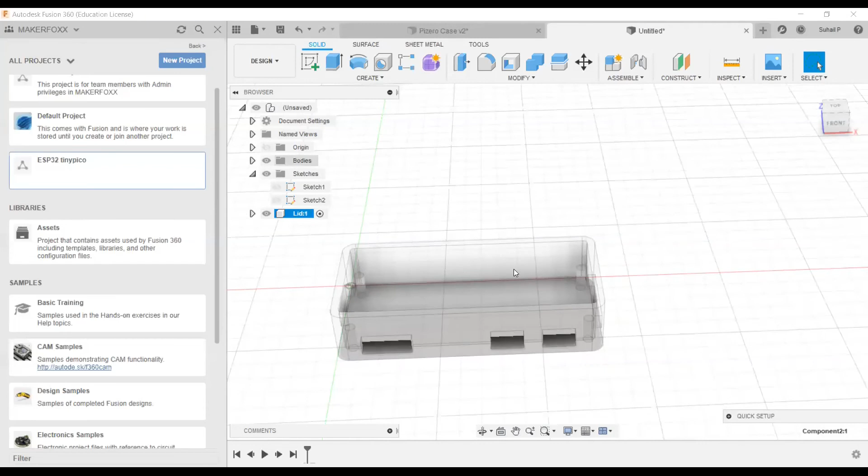Let me delete it, and right click in the project browser or project explorer and click create new component, insert, and change the name - don't stick with the default name, just change it to whatever it is, in this case 'lid'. So I'll create a lid. To create the lid, I go into the primary component.

I just came back to the view, and I need to create a sketch here. So I select and create a sketch and give an offset - I give an offset and click 0.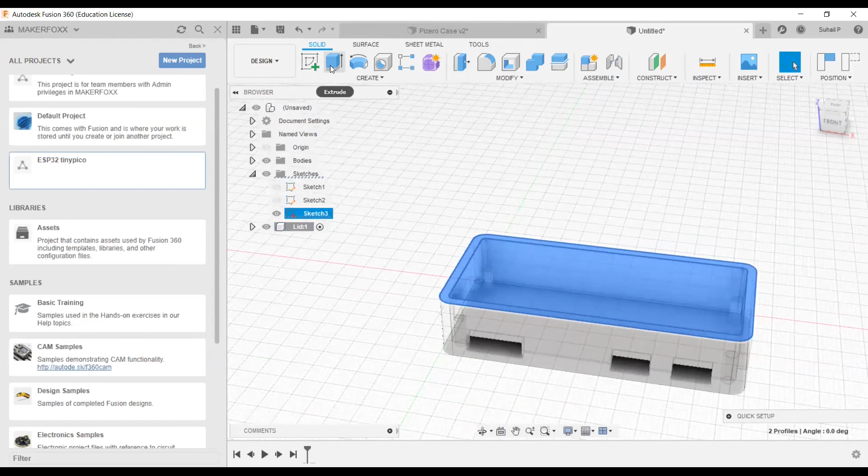So that's 0, and come back to the lid, turn on the lid—this is a simple trick so you could get a selection here. So here, see, we got another sketch to create a lid. To this, I just capture position, and it's not matter. So create a 2mm lid—I just created a 2mm extrude.

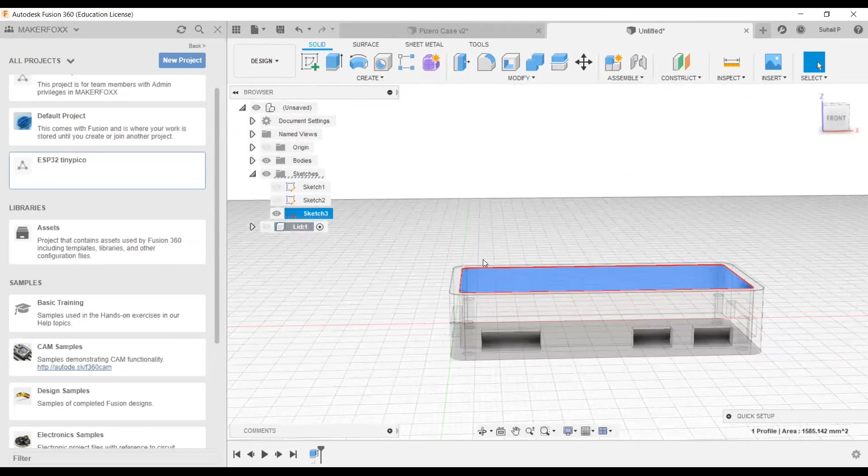Now what we're going to do is another step. We need to come back into the section, and we need to turn off the lid. What we're going to do is turn on the last sketch and click here, then go back to the lid and click here. And we're going to extrude this into around -2.

So it will create—we just need to place it correctly, right? We only need to pop it into that case. So what I'm going to do is turn off this body so I can see the lid. Here, see, there is another extrusion from the bottom to the below of that lid. And what I'm going to do is again create a sketch here.

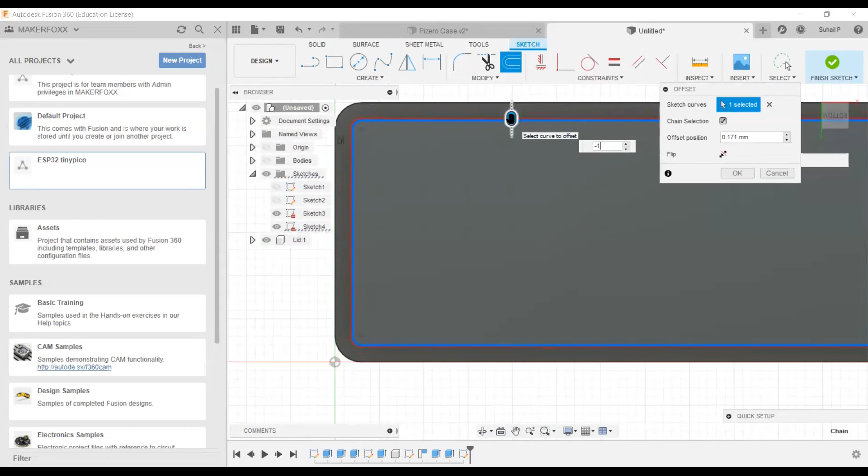So in the top, what I'm going to do is again an offset here—I'm going to do -1mm. So -1mm, and then press finish sketch and again extrude. So I want to extrude this to -2mm, and -2mm will be cut. Make sure to cut, because we need to cut off that area.

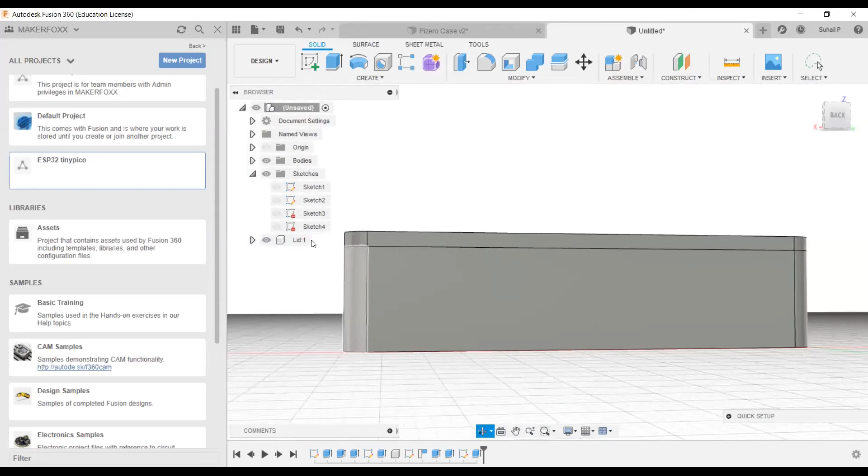So here, see, now you can see this—I'll turn off all these sketches, and you can see now we just need to pop it into that, just keep it in that case. So we can see directly, like it will be directly guided and inserted perfectly.

So what we're going to do is, there is a header pins, right—the GPIO pins. For the GPIO pins, we need to again turn on the first sketch, and turn off both bodies and lid. What I'm going to do is select that header pin sketch, then turn on both the lid, and just extrude. So I selected that header and I extruded here.

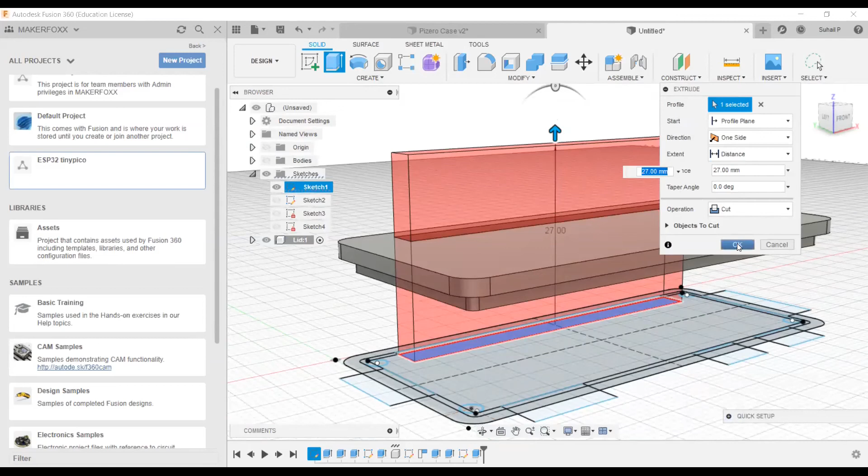So for the extrude, it will be cut off—just select the cutoff default and click. So here, see, we gave a space for the header pin. Now we need to turn on that body. When we turn on that body, see, we have completely made a Raspberry Pi sketch.

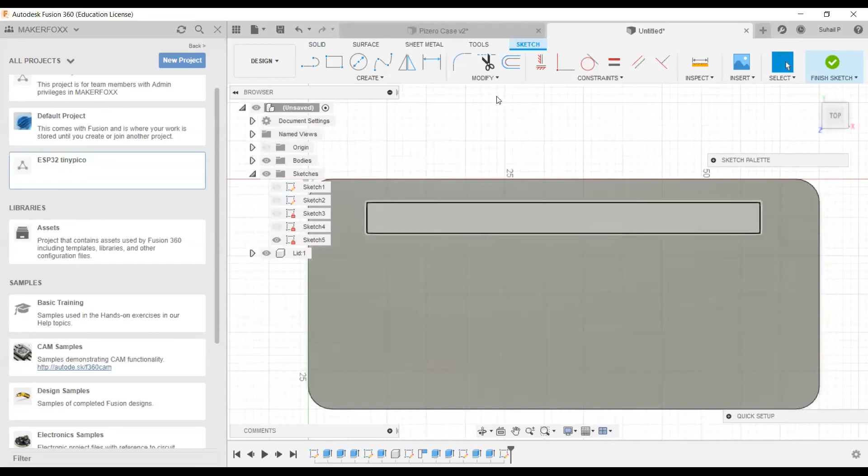So just drag it to below—I just de-extruded it. So you can see there is some, we need some of it there, so we just kept that. Okay, so here, now we keep that offset value also.

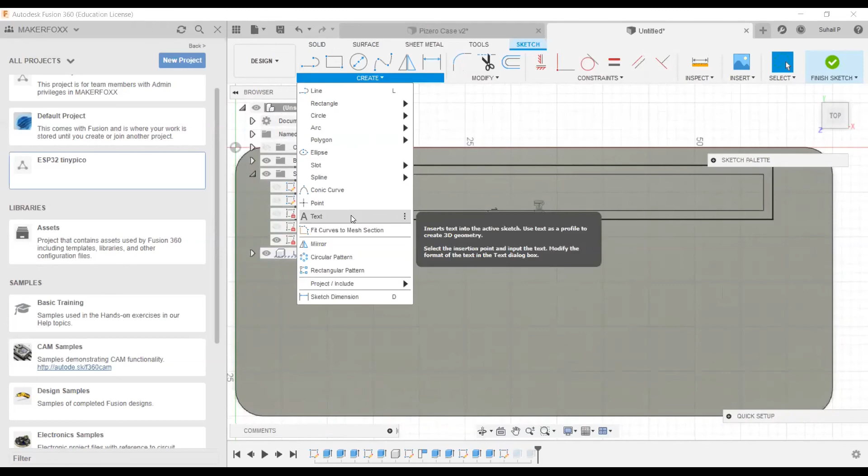Now what we're going to do is, if you have any name or something, edit sketch here—I edit the same sketch. If you need to add any text or something, go to that drop-down menu and select text, then click the surface anywhere. In the text window, the text field, what I'm going to do is type MakerGram. I entered MakerGram, zoomed out a little bit, rotated it to the correct position, and dragged and dropped it here. The size should be around 8mm.

So it will be—sorry, we need to move it, the text. We need to move it back to the correct location.

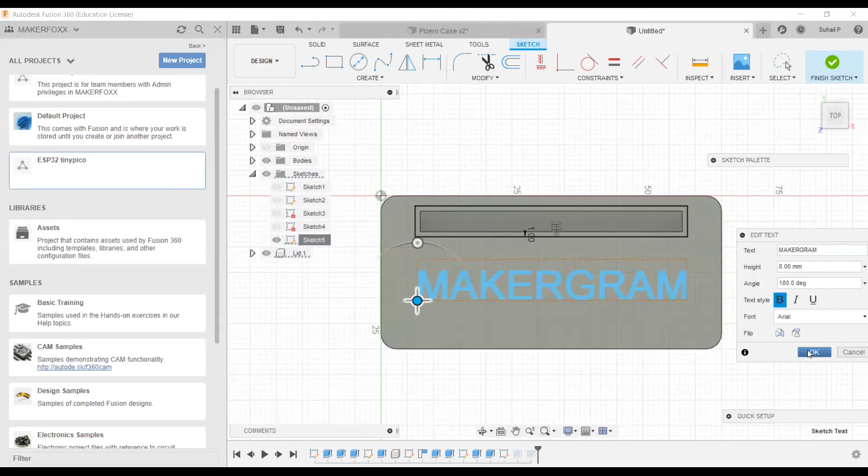So around here, it's fine. The text style should be bold for a better view. What I'm going to do is select this and extrude it. I'll select here and give it a value - you can minus it to de-extrude or extrude it. I'm going to extrude it to 1 mm.

So here you can see this is the MakerGram Raspberry Pi case, Raspberry Pi Zero case. Now if you need to make something look better, what we're going to do is select the fillet option in the modify section. I'll select the corner, enter the corner selection, and just enter 1 mm fillet. So it will fillet - here it is filleted.

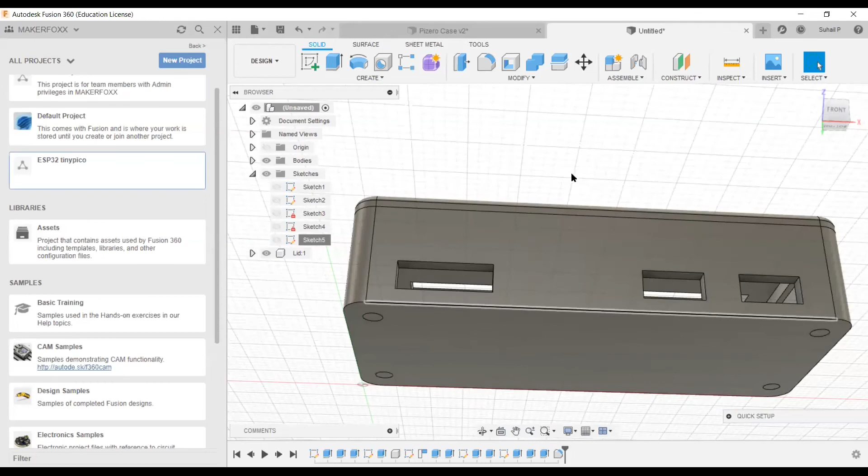I don't do this for the bottom, because if you're 3D printing, filleting in that surface area will make a worse quality. So I just keep that for the top, for the lid. I kept it as 1 mm.

So there are holes for every port on the Raspberry Pi Zero, and we can keep the Raspberry Pi Zero inside here. So this is how we create a design case for additive manufacturing, or a case for your electronic project. Now we need to export these bodies into a 3D modeling file.

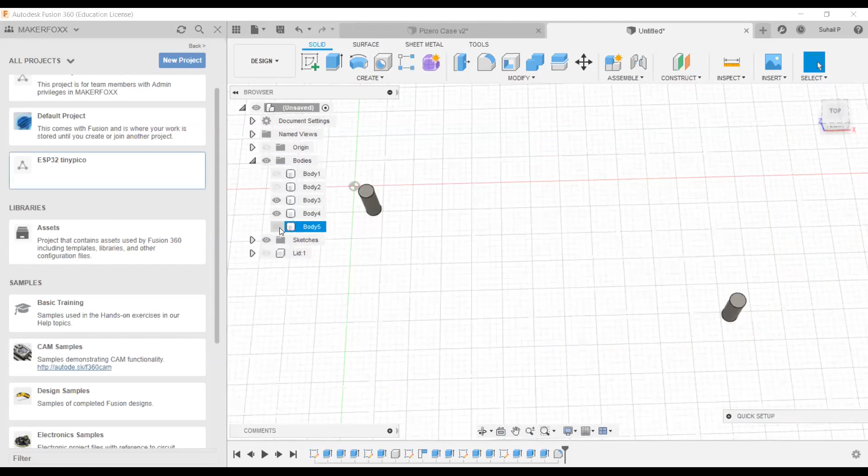So here, accidentally, the standoffs came as separate bodies. So what I'm going to do is select modify, select the parent or target body, and select all these standoff bodies, and click OK. Four of them, click OK. Now it will combine into a single body.

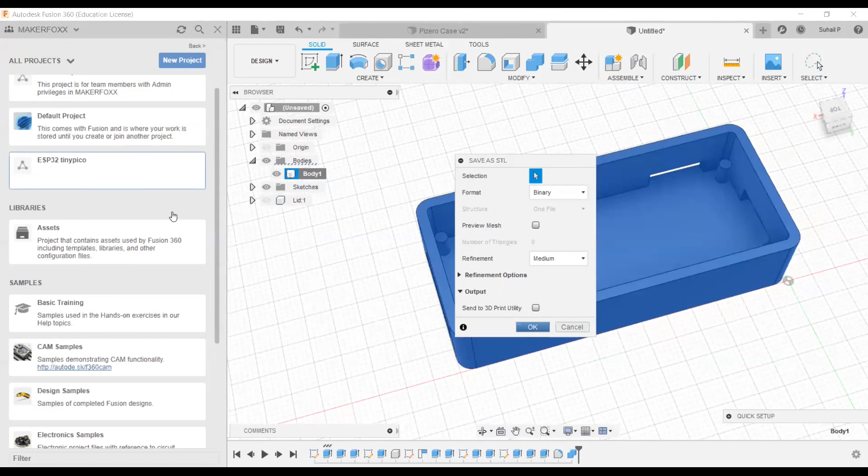So this is now a single body - when I select it, it will completely select it. Now to save it as an STL file, select that body, right click, and here save as STL. Click save as STL, and you don't need to do anything else - just click OK. You will come to a folder where you can save it. I'm going to name it Raspberry Pi Zero underscore bottom, and save it as STL.

And for the lid, I turn on the lid, and I need to save as STL. I turn on that lid and save as STL - just click save as STL, click OK, and save it as lid. So now we've saved both in STL format.

Now, if you want to do 3D printing, what I'm going to do is open up Cura. Cura is an open source slicing software for 3D printing. It was basically made for Ultimaker, their proprietary 3D printers, but it is now open source - they released it as open source. You can add any other branded third-party 3D printer like Anet, Ender, Creality, Prusa, or any 3D printer.

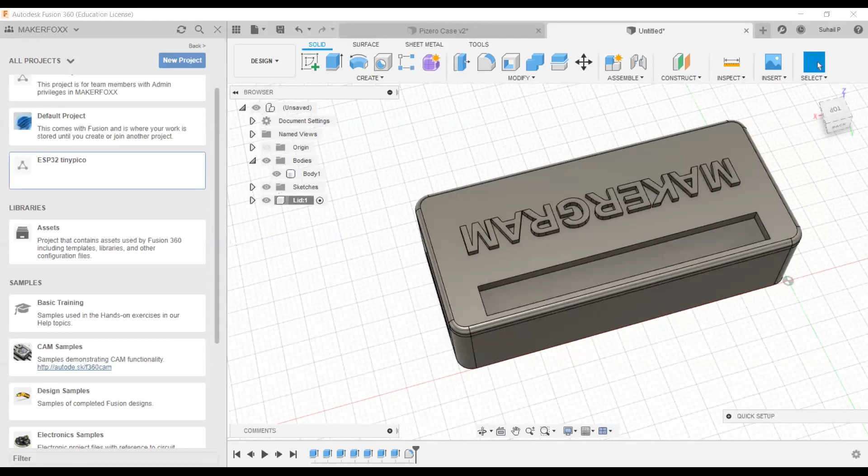So I'm going to turn on my Cura, and I will show you how we're going to do 3D printing. I'm going to stop sharing and screen share.

Okay, so hey, sorry for the interruption again, Suhail. Yeah, the time, okay, yeah.

If anyone needs to know how to do 3D printing, you can chat, or we can make a post on makergram.com, I think. So that's it - Abhay, let me know if anyone has any doubts in this section.